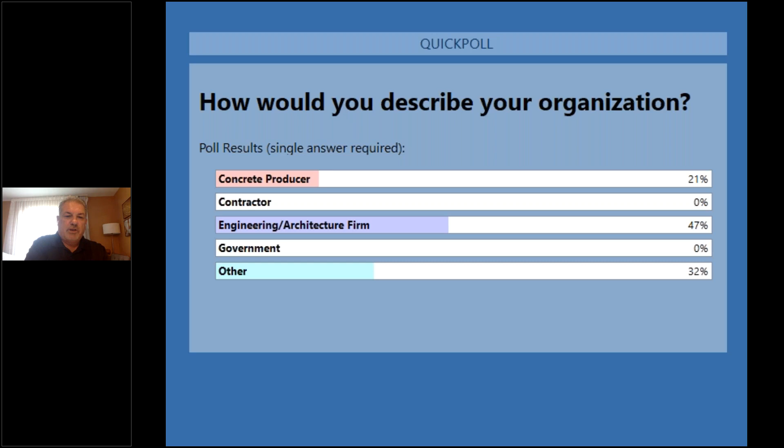Cool, there we go. So we've got a good mixture. We've got about a quarter of the group are concrete producers, good representatives from engineering and architecture firms, and then the always interesting other category. So good feedback from everyone. Thank you.

So we all know that we're going to build an awful lot of concrete. So how do we make sure we deal with this and make sure we're as effective from an embodied carbon standpoint as possible?

What's interesting right now, especially in Canada, is we've seen a number of federal announcements. There's a lot of federal infrastructure funding going on, trying to make sure we're looking at things like life cycle analysis that are driving decisions in concrete construction. This just popped up last week from the Toronto City Council - they're approving a strategy to reduce building emissions to net zero. Pretty ambitious goal for sure. We've seen similar elements in Vancouver, where I'm based, where the city is trying to reduce carbon emissions by 40% by 2030, and the concrete industry out here is working aggressively to do that. A lot of the steps producers are taking already will get there, but it's interesting that this is very visible at a Toronto City level as well.

This might be a good place to do the second poll if you could, Tracy.

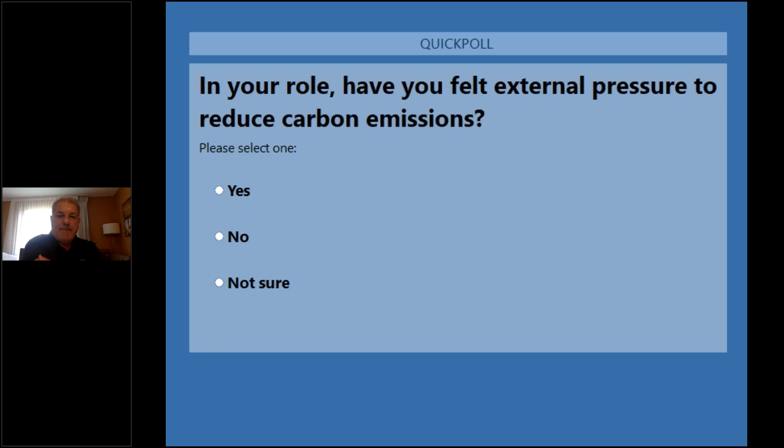So just a quick question, kind of a yes or no answer: are you seeing that external pressure, or is it something that's coming internal from your organization as well? We can probably close that - that's a nice quick one to go through there.

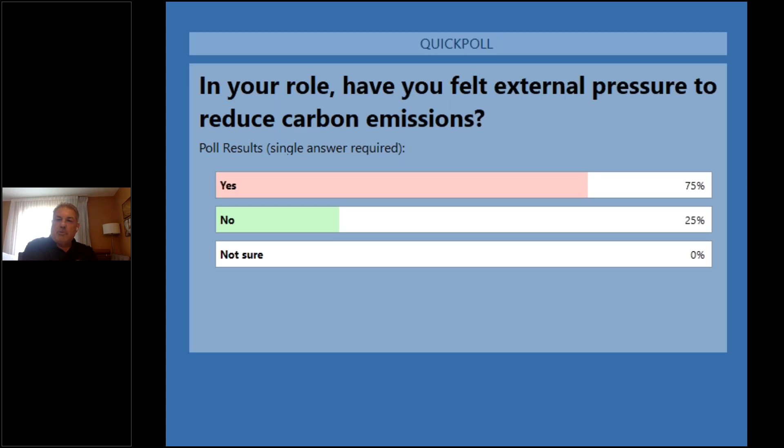Okay, good, so I'm back in control there. Well, I'm not sure whether that's a good thing that we're feeling pressure or not, but the good thing is that it is visible and it's driving the decisions we're making when designing and specifying concrete to be used in construction projects in Canada.

Some of the people feeling pressure around incorporating low carbon initiatives into their concrete are the structural engineers.

When we look at embodied carbon, it's important to acknowledge the distinction between embodied carbon and operational carbon. If we look at a large condo or office building in downtown Toronto, the reality is the building code has changed substantially. Those buildings are more airtight than they ever were. If they're concrete buildings, they likely have better thermal mass than some of the things that were built before. We're becoming much more effective in terms of managing operational carbon, so they take less energy to run than they used to because we can heat and cool them more effectively.

Maybe we do the third poll that we have now, Tracy.

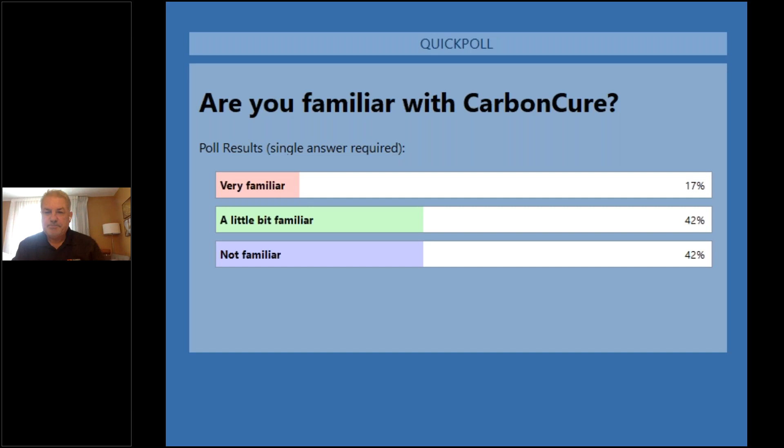Okay, let's close that now, Tracy, and we'll move along. That's good - we've got a good portion of the group at least aware of us, so we'll move along.

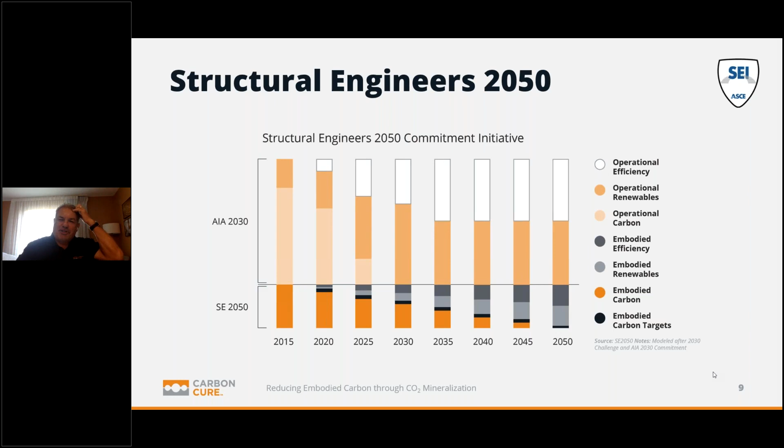I'll stay off the polling button for a little while and actually spend some time presenting with you now.

So why now? There's a big focus by governments and institutions to really reduce emissions from buildings and construction, as we touched on previously - 40% of greenhouse gases are actually coming from buildings primarily. We're seeing the amount of construction continuing coming out of COVID. It'll be interesting to see how things move along. We're seeing a fairly good pipeline of projects right now, and we hope that is sustainable - if we continue to build those buildings, we need to focus on embodied carbon and concrete particularly. If we look at the amount of emissions we're going to contribute, that's even more reason why we need to focus on this.

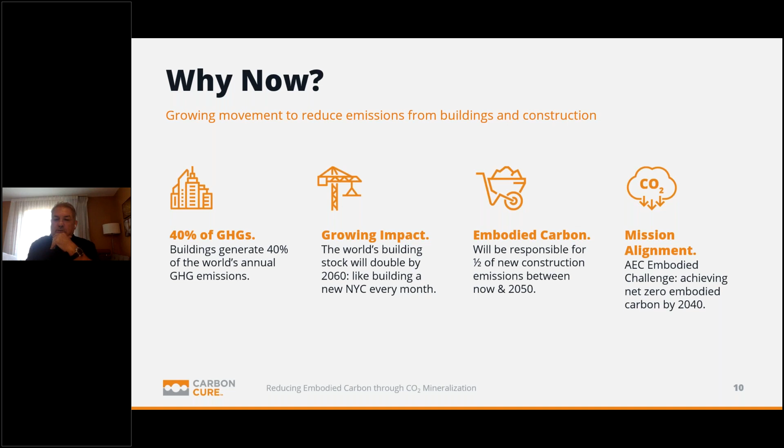We just need to align in terms of what the mission is. Even CarbonCure's stated mission is to remove 500 megatons of CO2 annually. That would require us to have a pretty good baseline of concrete producers using our technology, along with some future technologies we're developing that look into reclaimed water and recycled aggregate.

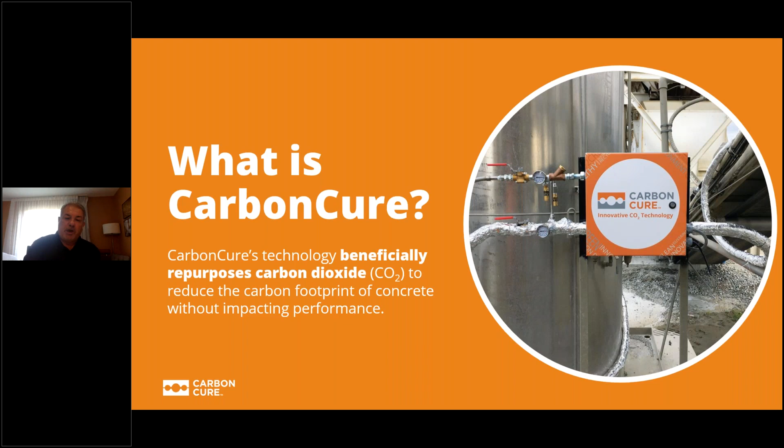In the Ontario market, the CO2 we use primarily comes from petrochemical companies down towards Sarnia. Different areas of the country provide CO2 through CO2 gas providers such as Praxair that primarily come from the petrochemical industry, so it's a byproduct of that. It's the same CO2 that's actually used in soft drinks and certain beverages we occasionally drink when watching hockey games. We're not creating it—we're basically taking a waste byproduct and incorporating it into ready-mix concrete as effectively as we can.

When we inject CO2, it reacts with the cement particles and actually recalcinates a portion of that cement back to calcium carbonate. When you're manufacturing cement, you're basically heating up limestone into clinker at about 2,600 degrees. That chemical reaction creates CO2 at the same time, plus the energy required to drive that. So if we're able to reduce a portion of the cement from a mix design, we're able to have a fairly positive environmental impact, and that mineralization drives the conversion back into calcium carbonate, or limestone.

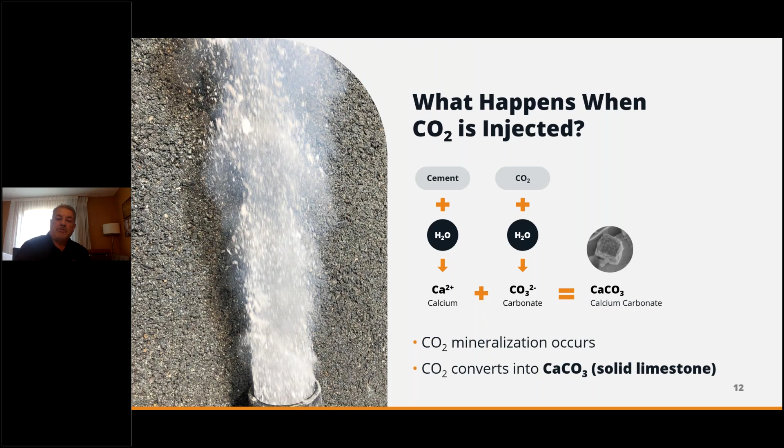When we convert that into a mineral, we create these nano-nucleation sites. Think of what happens when you have a magnet and little shavings of iron particles—it basically attracts them. The same thing happens here: when we inject the CO2, those nanoparticles start to create nucleation sites, and that's what gives us the compressive strength gain that drives the mix design optimization we work on. This is an example of a scanning electron microscope image showing what that looks like.

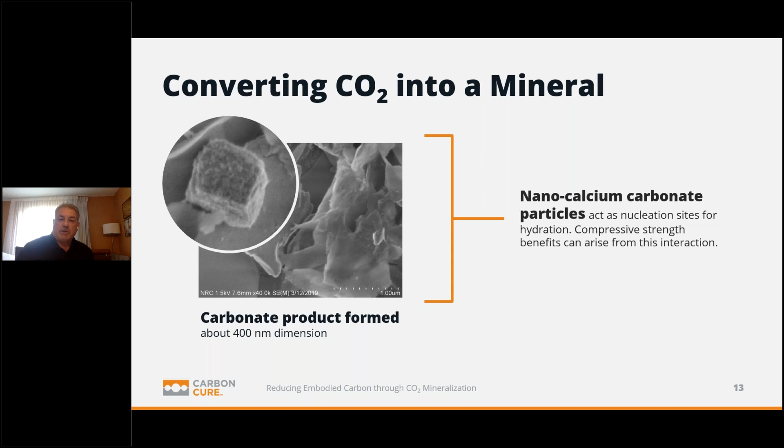So how our technology works—really three main phases. First, we go into an installation phase. You can see one of the boxes our engineers install that attaches to the CO2 tank that companies like Praxair deliver. This is our valve enclosure, where we take that liquid gas and convert it, pushing it into the ready-mix injection process.

From an integration standpoint, we're really a retrofit technology, so we incorporate directly into the batching system that any concrete producer may use. If you're a producer using Command Alkon, Marcotte, or Impact, we integrate directly into that batching software. Once we're plugged in and integrated, we run seamlessly, no different than another admixture.

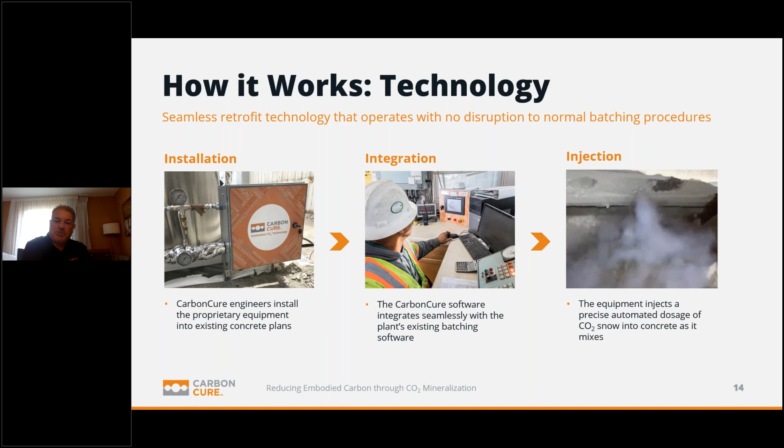In the final phase, once all the equipment is bolted on, we control the equipment to deliver a controlled amount of CO2 into the concrete as it mixes. Although it doesn't look overly precise, think about what happens with a fire extinguisher spraying something—CO2 kind of looks like that going in. There's an injection nozzle placed: on a central batch system, it's dispensed where all the raw materials go in; on a dry batch system, we're dispensing the CO2 on top of that. Regardless, we work with the engineering teams at the concrete producer to optimize that mix design.

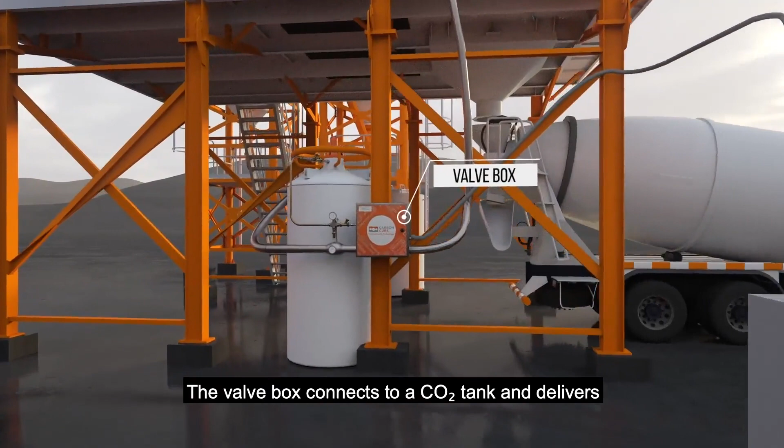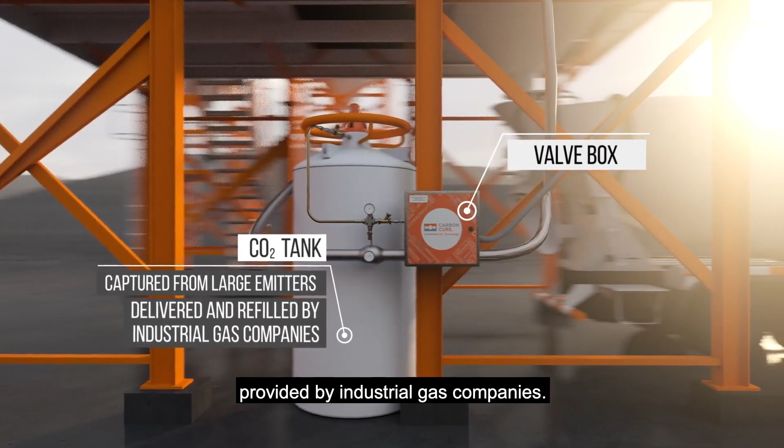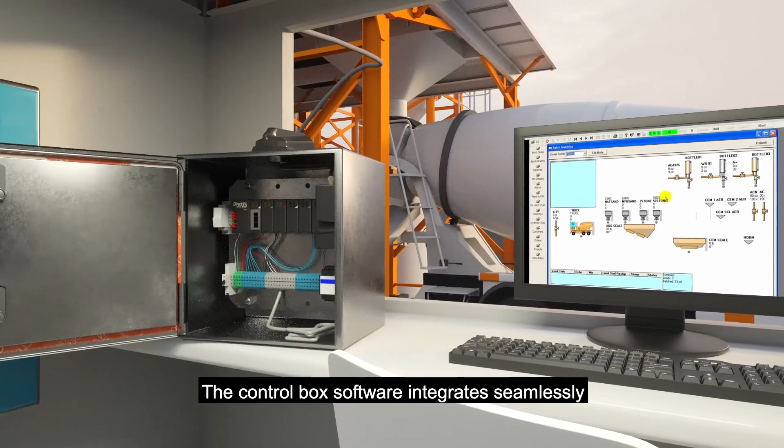CarbonCure technology is made up of two boxes: the control box, which is the brains of the operation, and the valve box. The valve box connects to a CO2 tank and delivers a metered quantity of CO2 into the concrete mix. The CO2 is stored on-site in a pressurized tank provided by industrial gas companies. The control box monitors the performance of the valve box system in real time and feeds back all usage data to the CarbonCure command center. The control box software integrates seamlessly with all existing batching software, so adding CO2 into a mix is just like adding an admixture, meaning no impact on batching or loading cycle time.

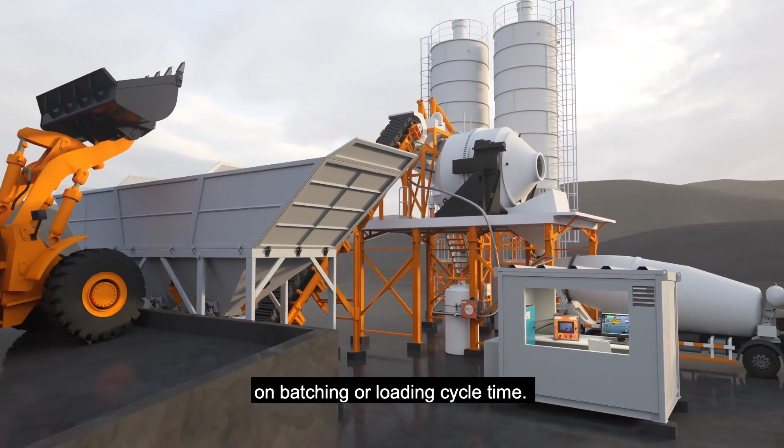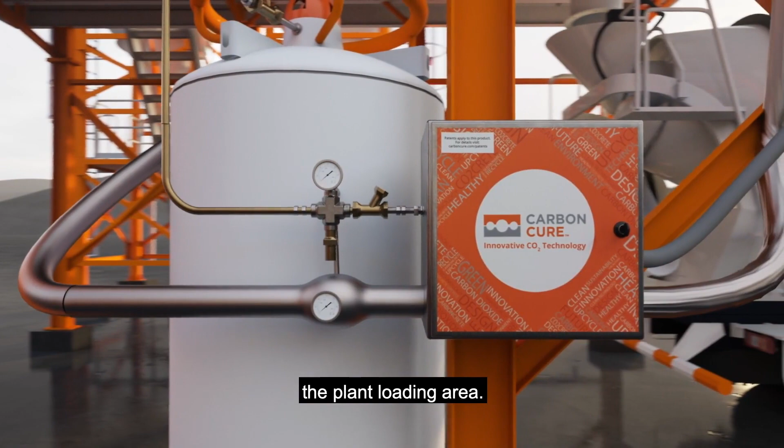Transfer hoses deliver liquid CO2 from the supply tank to the CarbonCure valve box, which is at the plant loading area. The valve box then meters and delivers a known amount of CO2 into the concrete mix based on the cement content of the mix.

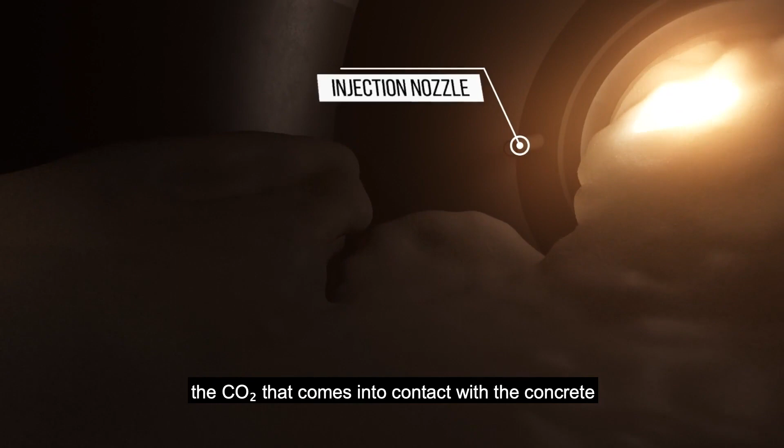The CO2 automatically injects into the mix once roughly half the cement and water contents have been discharged. While liquid CO2 is stored in the tank on site, the CO2 that comes into contact with the concrete is actually in a solid and gaseous state, similar to dry ice or snow. It changes state once it leaves the CarbonCure valve box due to a significant drop in pressure.

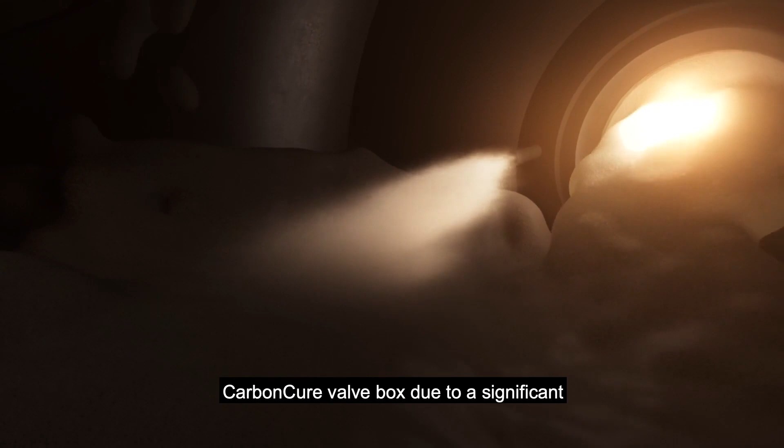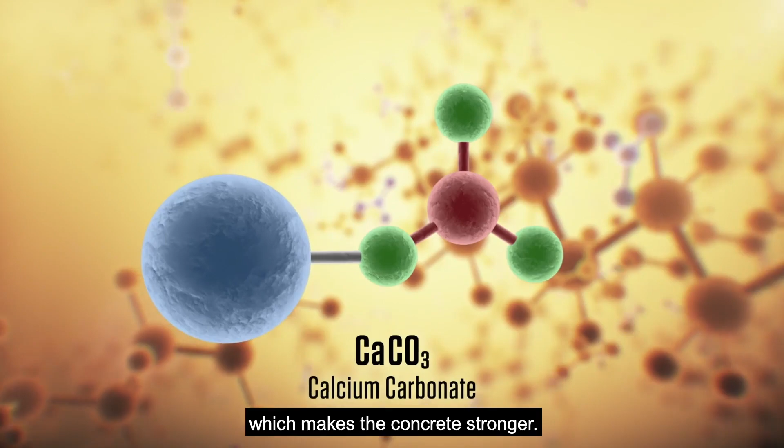Upon contact with the mix, the CO2 undergoes a chemical reaction and converts into a mineral, calcium carbonate, which makes the concrete stronger. Plus, what was once CO2 is now eliminated, never to be re-released into the atmosphere, even if the concrete structure is demolished.

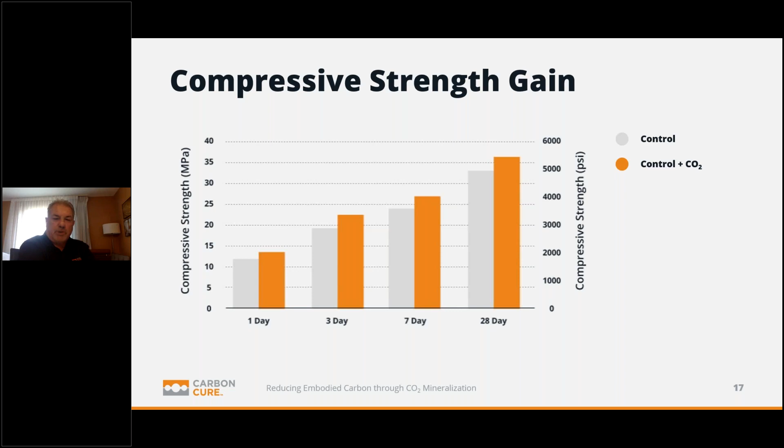This is just an example of a chart that we would see from some typical testing that we would do with the producer. The bar on the left is the control. The bar on the right, the orange bar, is the sample that has CarbonCure incorporated into it.

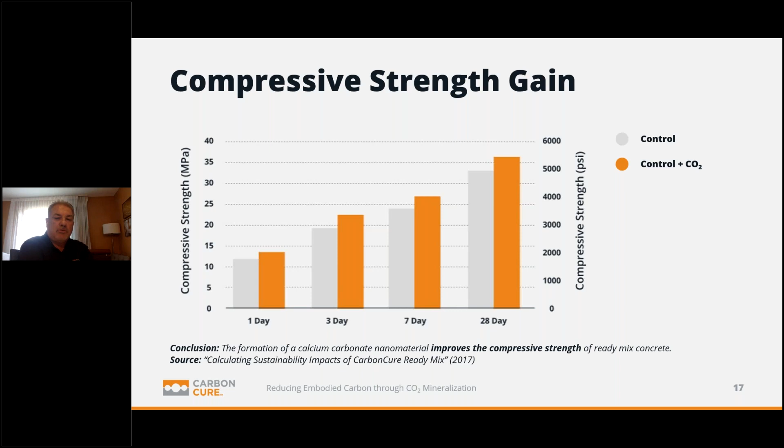So what we'll typically see over those testing periods, when we break the cylinders at 28 days as an example, we may see a strength gain of up to 10%. So if you're designing a 25 MPa concrete, you don't need your 25 MPa concrete to be 10% stronger.

What you want to be able to do is have the optimal environmental impact. So what we'll do then is take out a portion of that cement. We'll obviously continue to optimize the dosage of the CO2 and then try to deliver that optimal 25 MPa concrete with the most reduced environmental impact as we can.

So when we look to optimize this, we hear sometimes, 'we make the concrete stronger' - is that what's driving the decision? Certainly it does, but what we're trying to do is just optimize the performance with the producer, with the optimal amount of cement and the other raw materials that they're using, and an optimal dosage of CO2.

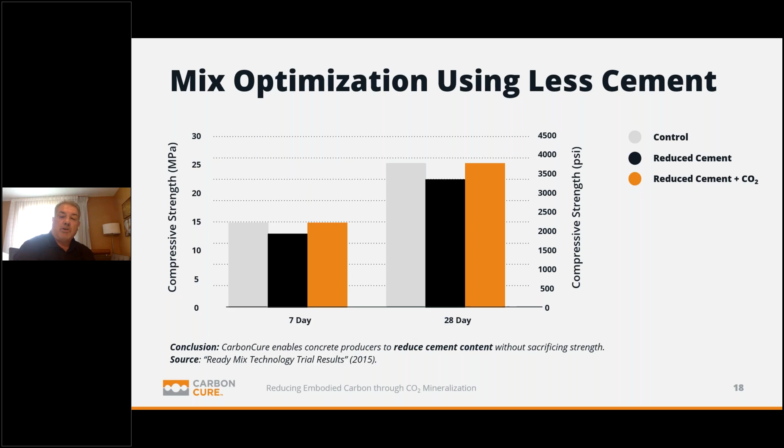So typically what we'll see on a cubic meter of concrete is roughly we'll reduce the environmental impact through cement reduction of 10 to 15 kilos of CO2 reduced. And this is important because we start looking at the global warming potential of a project, and it starts to add up pretty substantially.

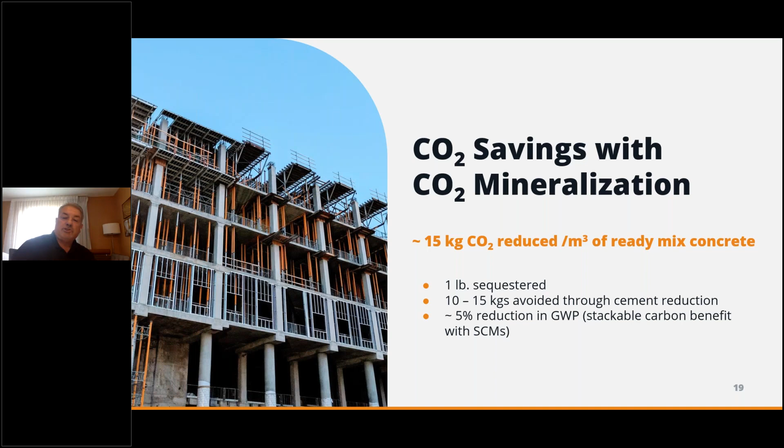If you have a larger project that might have 20, 30, 40,000 cubic meters of concrete, you can imagine the reduction starts getting into the hundreds of tons of CO2. So that's what we're trying to do, is sequester that CO2 permanently in the structure through using our technology. So that's an example of what we see.

What people always want to know though is, okay, well what happens to the concrete? If you're injecting CO2 into it, do we have any kind of impact on the fresh properties or the hardened properties? And typically we don't. I was on site yesterday actually supervising some testing, and we don't see things in terms of looking at workability or slump. We typically are not impacting the air content, pumpability, all those types of things that your contractors or your placers or finishers are really going to be looking at.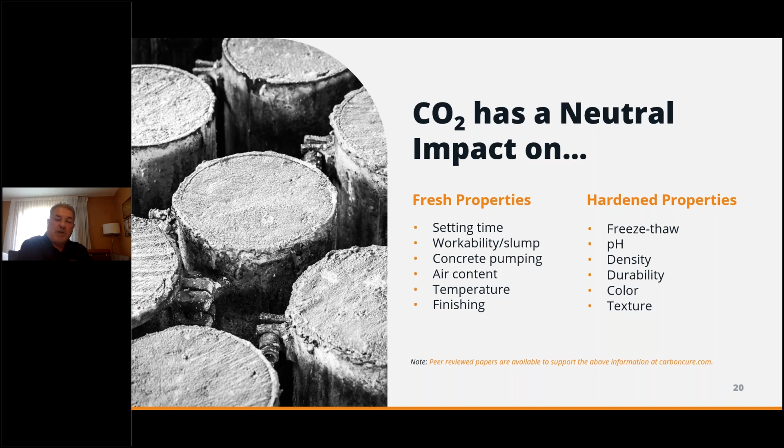They don't want concrete that sets up any longer, they just want what they've always had. And that's really what we try to do, is deliver concrete that's just like they had, with a better environmental footprint. From the hardened properties, we've got some good white papers that support this from a durability standpoint, in terms of looking at testing in terms of strength, longer term performance of the concrete in Canada. Things like freeze thaw are particularly important to us, pH levels and what have you. So typically we're not going to impact things differently than you see in your traditional mix designs that you're already using.

So where is CarbonCure? We've got locations, we're pushing almost about 400 plants, primarily in North America, as you can imagine. We're based out of Halifax, Dartmouth, Nova Scotia. We have a good footprint across North America. We actually just did our first installation in New Zealand, of all places, so maybe we can get a rugby match going with those guys.

It's a really big focus for us and we're really trying to rapidly expand. You may have seen earlier this year we successfully won the Carbon X Prize, and one of the things that comes along with that is it's enabling us to invest in the people and technology we need to scale up the business even more rapidly. We're starting to grow exponentially. Some of you on the line are part of the reason for that, which is great, and we appreciate your support. It's really a global initiative within CarbonCure. We're now pushing about 10 million cubic meters that we've poured with CarbonCure. I remember last December we did our 1 millionth truckload. So things like that are pretty big milestones for a company like us.

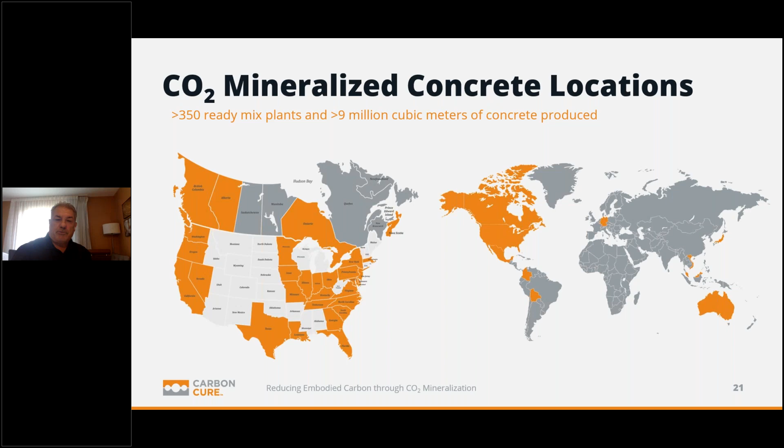These are some examples of projects we've done, just to give you some idea of the scope and where we're starting to work. This project was done a little more than a year ago with our friends in Calgary on a de-icing apron, a little more than 25,000 cubic meters, poured pretty rapidly through a portable plant, going through a slip form paver, ultimately saving about 160 tons of CO2. This was driven in Calgary through WestJet and the Calgary airport, and we're actually just getting ready to do another phase with this.

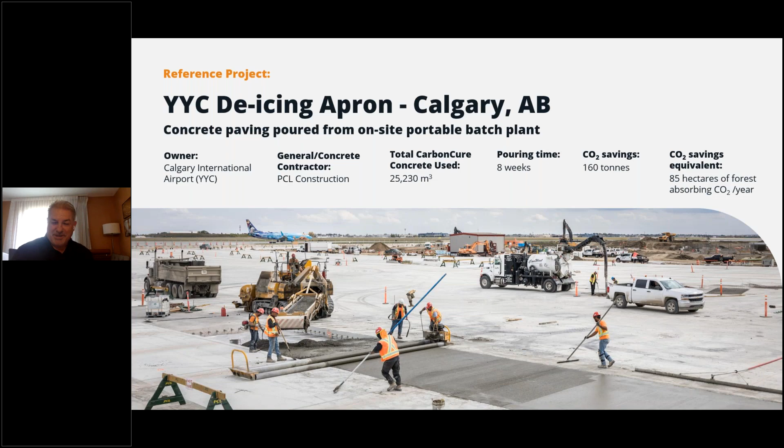As much as we do most of our business through batching plants located at a physical ready mix facility, on larger projects we do have the ability to integrate into portable plants. And as many of you will know, these plants, although portable, fit on 4 or 5 trucks - they're not really super nimble. But that's a good example of a project.

These are projects - you'll see a lot of this type of construction in Ontario also. This project happens to be based in Tennessee, just as an example, but you've got a lot of tilt-up walls, a lot of slab on grade, a lot of parking. All of these are areas where potentially you can integrate CarbonCure into the mix design. This is something we really focus on.

One of our investment backers is Amazon, and as many of you will have seen, there's a lot of Amazon distribution centers. These are the types of projects that in many cases are big enough for a producer in a new market to adopt our technology and figure out where we go from there. We're actually doing a project in Oregon right now with Facebook, and it's really driven the producer to come on board and expand and support that, and then integrate CarbonCure into the balance of their business.

On this project, you can see the equivalent carbon savings of 82 acres of trees absorbing CO2 for a year - pretty substantial. These are things we look at and work with producers to be able to support, to enhance their business, and then work with the engineering and design community to make sure we're delivering the most efficient performance we can.

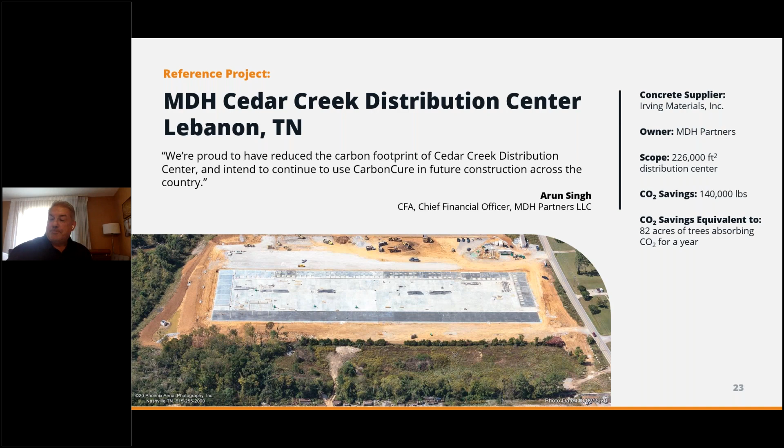Just some other examples of projects you can see here. We've done some high-tech stuff, lots of things in the Bay Area and California with things like LinkedIn. We've done hockey arenas in Halifax, as you can imagine. The RBC Centre project was quite interesting because in addition to the regular construction phase, it was the base for the ice pad as well, and the finishability of the concrete was extremely important.

As you can imagine, with a lot of these multi-purpose arenas, it's everything from an ice rink to a trade show floor, so all those things have to be incorporated. The de-icing apron, as we touched on earlier, we've done some work with Departments of Transportation in exotic places like Hawaii. Not that that's particularly relevant to you, but that's driven work we're doing with the Chicago DOT in Illinois and Iowa, where the performance of the concrete would be more similar to what you see in Ontario.

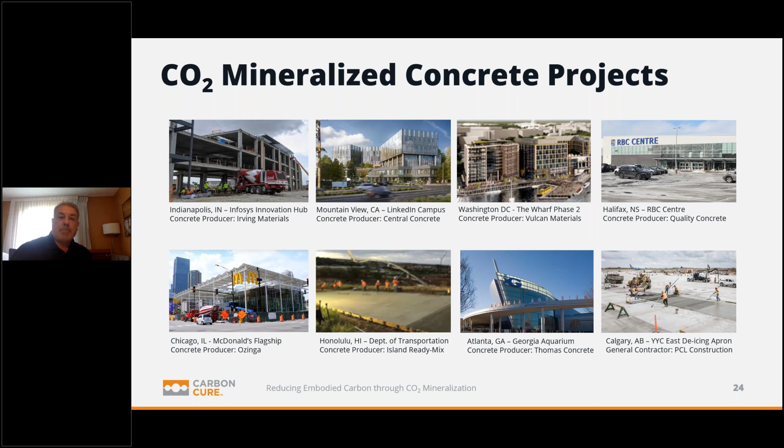Some customer success stories, and these are really important to our business. Our customer ultimately, who CarbonCure really transacts with, is the concrete producer. These are examples of a number of producers with multiple locations that have really integrated CarbonCure into their business model, trying to install it into all of their facilities to support their environmental initiatives in their particular marketplaces.

So we've got some good examples here. A Canadian example would be, and we're just working on some PR with them, Butler Brothers on Vancouver Island. A very substantial producer in that market where almost every meter they produce incorporates CarbonCure. Lots of projects in the Capital District out on the West Coast.

So why aren't we used everywhere? This is the million-dollar question. We call them barriers to innovation, but in a lot of cases it's really that prescriptive mix design versus the performance mix design. I think we've all seen it, certainly with the DOTs and MOTs, where there's minimum cement contents.

Ultimately, what's important is that we have a concrete mix design that delivers the performance that's prescribed for the project. So let's prescribe the performance, not the raw materials. All of the concrete producers on the call, many of the structural engineers, all of you know what works. I think our goal is to work together with you to deliver something that is environmentally beneficial, meets the performance that's critical, but looks at the appropriate cement content and other cementitious materials that you use, such as fly ash and slag.

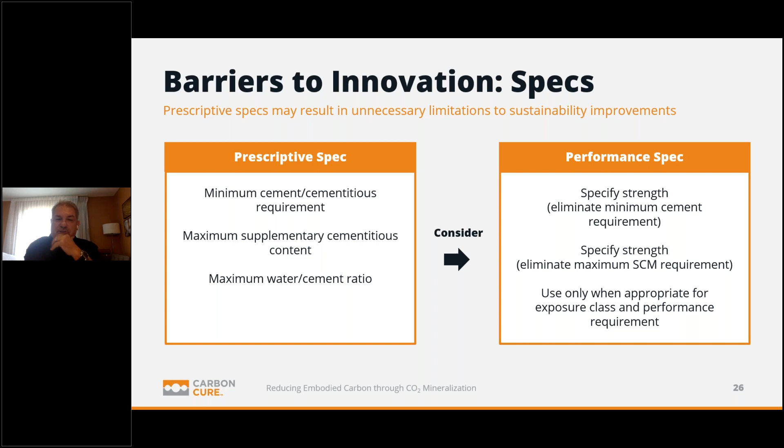So just a little bit of a stand on the podium for a minute, but looking at performance-based versus prescription, I think, is really critical.

Look at sustainability initiatives. We're seeing a lot of these come through the Canadian market. Concrete Ontario as an organization has done a good job driving this. Cement Association of Canada is supportive in these areas as well, but go to those performance-based specs. Look at cement replacements, using SCMs such as fly ash and slag, use the language that we use, and let's incorporate CO2 mineralization into there. You may see a few mix designs that say CarbonCure, but typically it's through the use of CO2 mineralization.

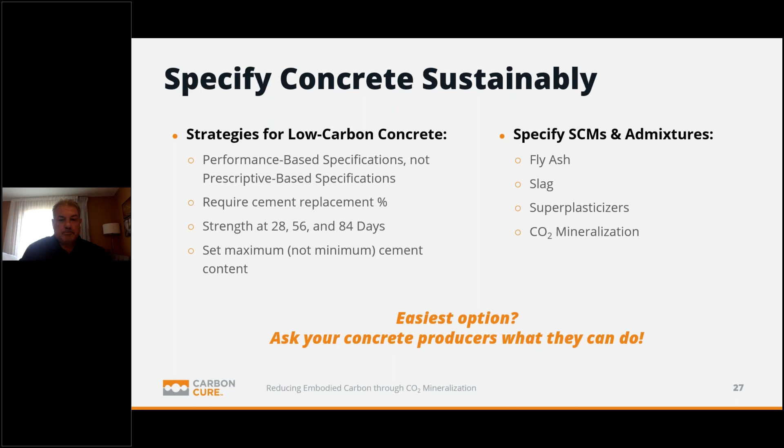But to that point, the easiest option is to talk to your producer. Just say, hey, we've got a mix design, we need 25, 30, 32 MPa, whatever the number is. Give me your best mix from an environmental standpoint.

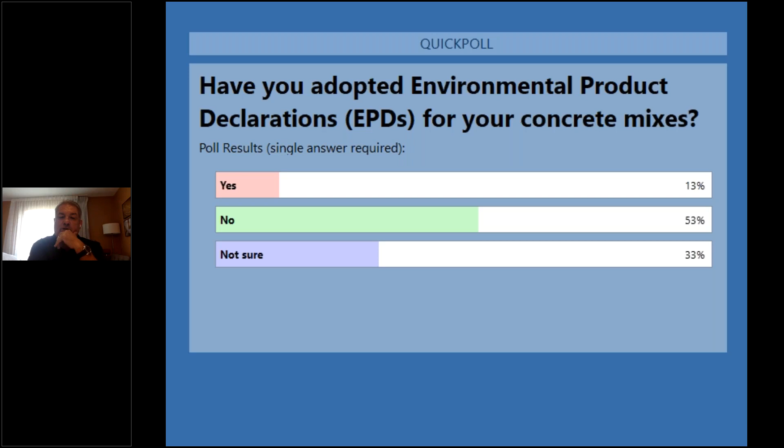So this is, you know, not entirely surprising. It's interesting where we're seeing more EPDs being requested. We're seeing more producers responding to that, to a certain extent. There's certainly national and regional programs for this, but we're certainly seeing from the requests that we're getting from customers the need to make sure you've got specific local EPDs for your particular plant. There's a cost to this, certainly, and I think that's one of the limitations initially, but I think it's going to become more of a standard practice and almost a condition for doing business.

So we're seeing much more of these being adopted. People are asking for it. Be proactive if you can. Look at things like, we use the term internally all the time, GWP - let's have a good global warming potential number on this concrete. What they're really trying to target is the kilos of CO2 that are emitted per cubic meter of concrete.

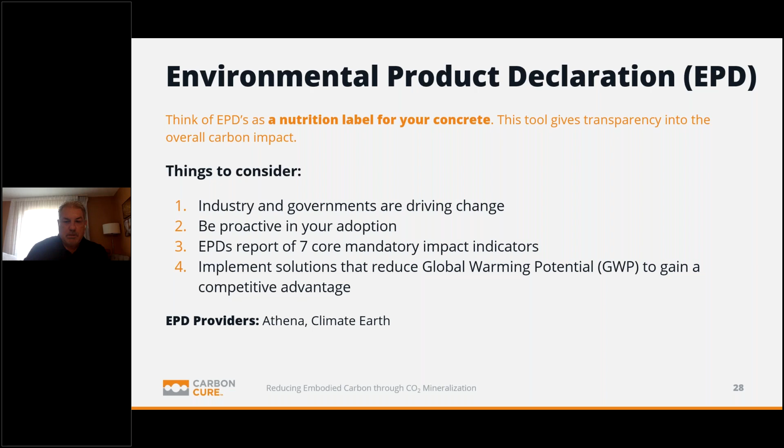Okay, it's lagging a little bit here.

One of the great tools we see is the website buildingtransparency.org, what we call the EC3 tool, an embodied carbon tool. It's a repository where any concrete producer, anyone with a mix design, can upload their mix design and their EPD, and it will tabulate this. So there's tools being developed that make it easy.

For the designers on the call, if you're designing something, you can look at different building architects and say, I'm building a 30-story building. What does it look like if I do concrete? What does it look like if I do steel and glass? What are the environmental ramifications of the designs I'm putting together? There are some really good tools out there.

This was developed through some Microsoft projects, with drivers like Skanska. We were involved at the front end, along with people like BASF and Master Builders. There are really good mixed design examples where you could take an initial mix design that could have been high, like 521, down to something lower in the 290 range. Honestly, we're seeing mixed designs with lower embodied carbon at 220, 230, 240, which would be quite common in the Pacific Northwest. So look for tools like that.

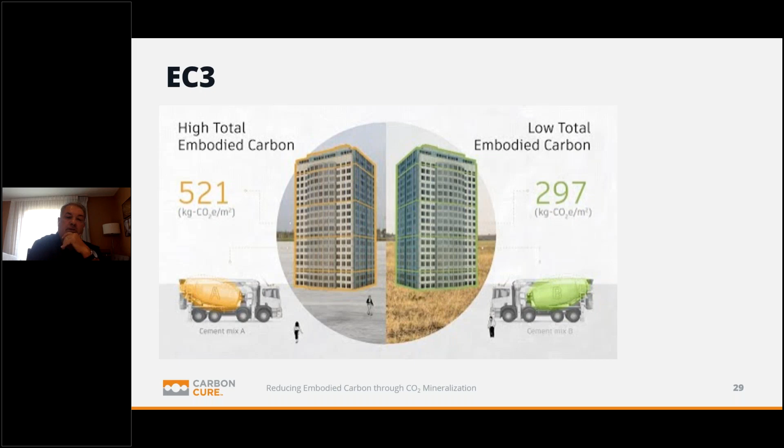If you just Google embodied carbon calculator or EC3, there's a link, and this is a no-cost tool that any of you can download and look at. So that's my plug for EC3 for the day.

So where are we going? I think this is becoming part of our lexicon - how do we decarbonize concrete as effectively as we can. From the CarbonCure standpoint, we want to make sure we're working with the concrete producer so they have ways to be profitable and differentiated, being able to do a rapid plant retrofit effectively.

This is an area where COVID, as we're coming out of it now, actually helped us be more nimble. Early in our adoption, we used to fly engineers around North America like Batman to install systems. We found that concrete producers are pretty effective at running their own plants, so now, essentially, we're shipping a crate out to a customer with a manual, walking them through it remotely, and then going in afterward to supervise if needed. So COVID has driven some innovation from our standpoint.

Really being able to integrate into the system overall, and that continuous innovation of low carbon digital technology - the digital part for us is really being able to calculate those carbon savings. We're actually going to market in some cases selling those carbon offsets or carbon credits, but that's a whole other discussion. And then working to develop partnerships across the whole value chain, really making a circular economy.

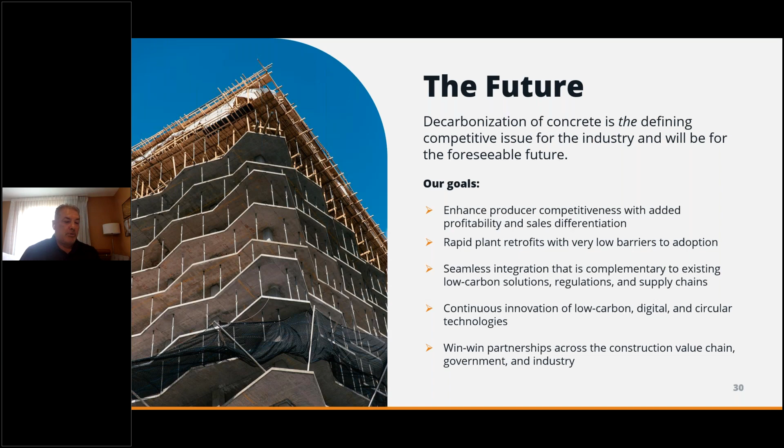So that's the conclusion of the presentation. A lot of information I threw at you there, certainly some valuable insights in terms of seeing the makeup of the group on the call today. From CarbonCure's perspective, we're very pleased to see the adoption in the North American market of our technology. We truly believe we're starting to have a more positive environmental impact the more we can scale. We look forward to working with you as producers and with you in the design community to make lower carbon buildings. So with that, I'll wrap up and let Oliver go into his pop quiz.

So I hope you were paying attention.

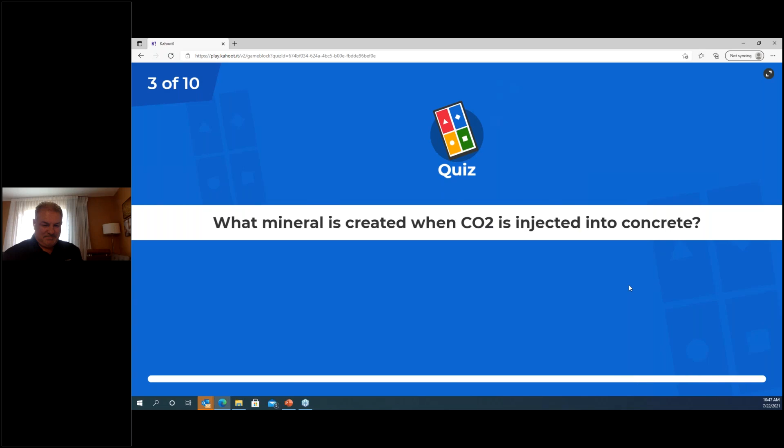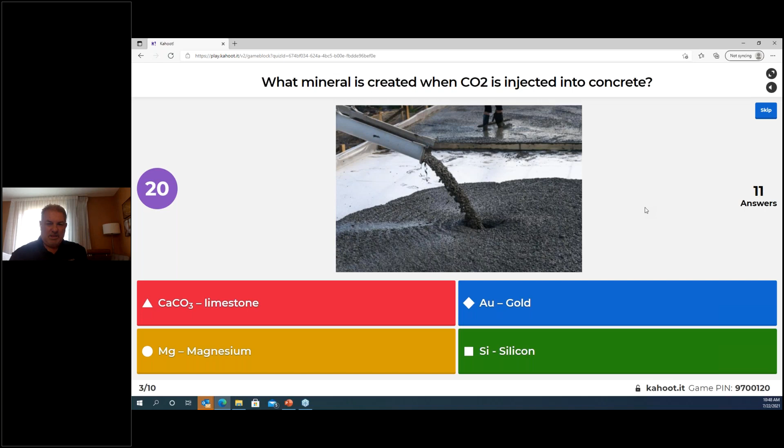Next question: what mineral is created when CO2 is injected into concrete? And ABC retained the lead on that one.

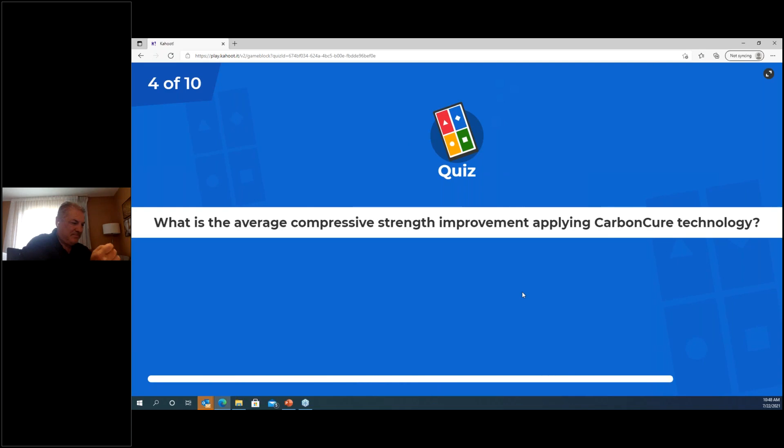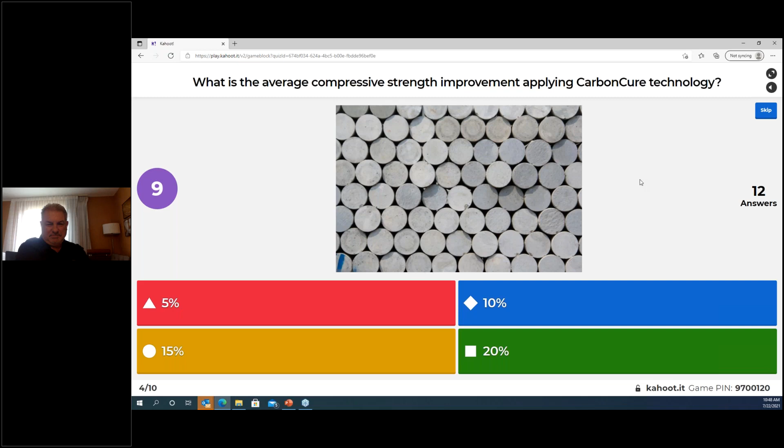Question 4: what is the average compressive strength improvement applying CarbonCure technology? Boy, everyone was quick on the draw on that one. ABC still in the lead, Scotty Mac moving up.

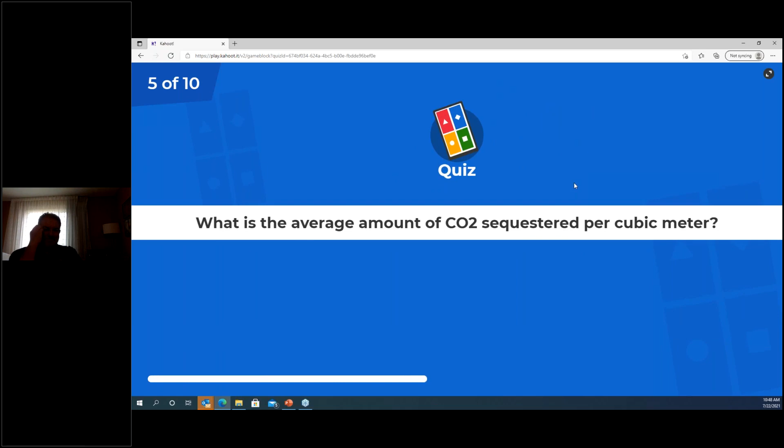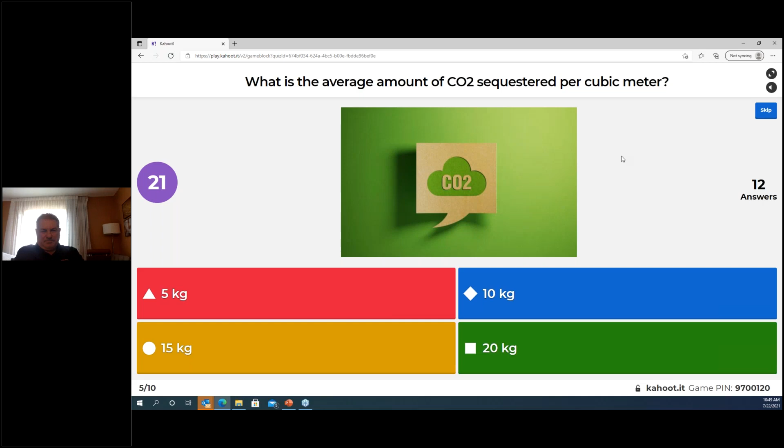Question 5: what is the average amount of CO2 sequestered per cubic meter? Okay, a little bit of movement—KL on fire now, takes the lead.

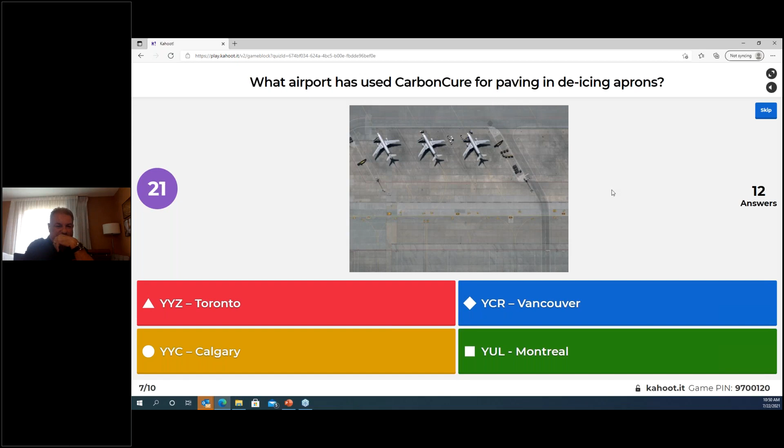Question 7: what airport has used CarbonCure for paving in de-icing aprons? And Concrete now moving up.

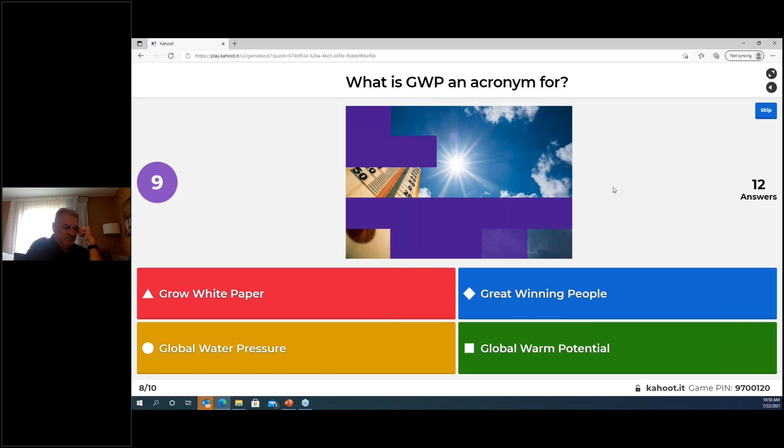Question 8: what is GWP an acronym for? And everyone got that right.

Concrete retaining the lead with 2 questions left. Question 9: which SCMs does CarbonCure work with?

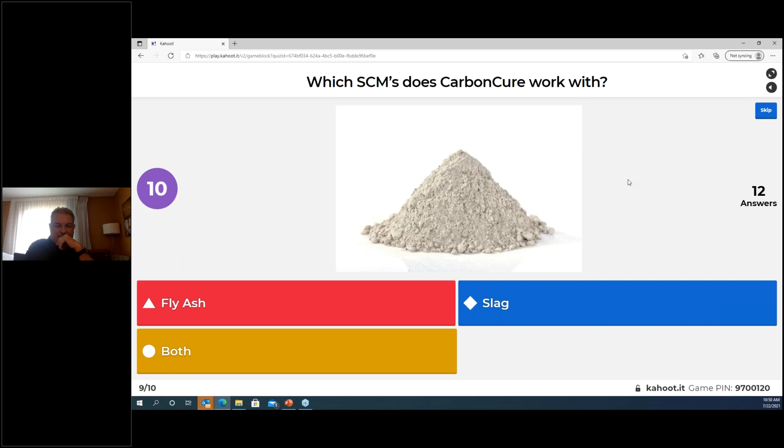Let's see where we stand now. Concrete still in the lead. Last question.